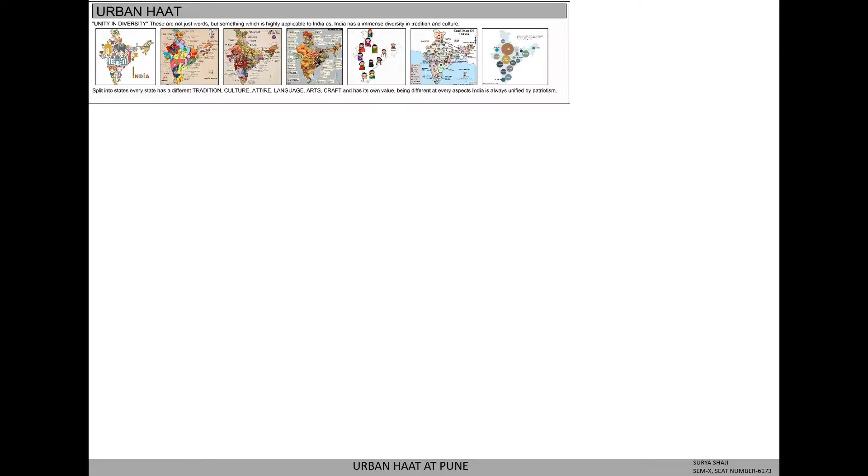So, what is an urban haat? Urban haat is basically a market where arts and crafts of wide varieties are sold and displayed. The scheme of an urban haat was founded by the Handicraft Ministry in 1999 in order to provide people with traditional skills a platform to display and produce their work.

Now, why is there a need for an urban haat? First, it helps to earn daily wages. It also helps in the economic growth of our country through cultural tourism and the handicraft sector. It also helps to revive the art, craft, culture and tradition which has been replaced by modern art.

Now, what are the initiatives taken by the government to promote the art? There are various yojanas promoted by the government. Some of them are Babasaheb Hastshilp Vikas Yojana, Jan Shri Bima Yojana, Rajiv Gandhi Shilpi Yojana, etc.

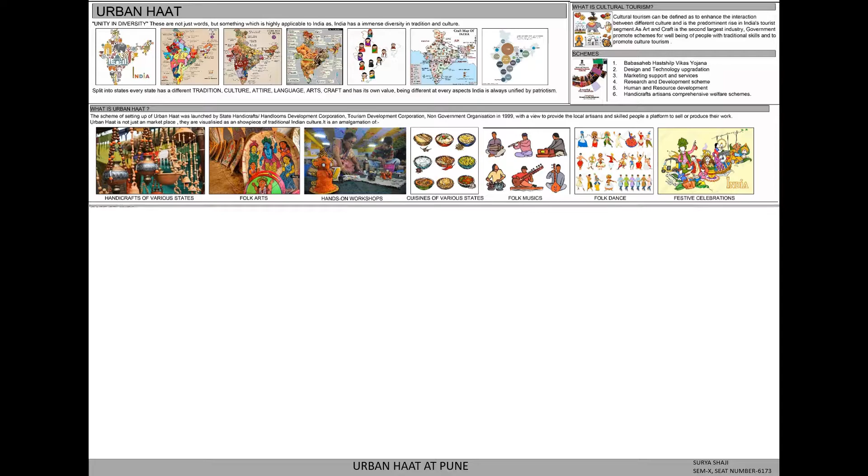Now, these are some of the live and net case studies done. The inferences from the case studies are: the activities were properly zoned out, but there was no connectivity among the activities. There was clear understanding in circulation and facilities provided for the visitor. There was harmonized landscape and ample parking spaces provided.

Now, where have I proposed my haat? It is in Pune. Why Pune? Pune being a cultural capital, there is no urban haat in the entire city. Also, as part of the Smart City project, there is a proposal for an urban haat by the Pune Municipal Corporation.

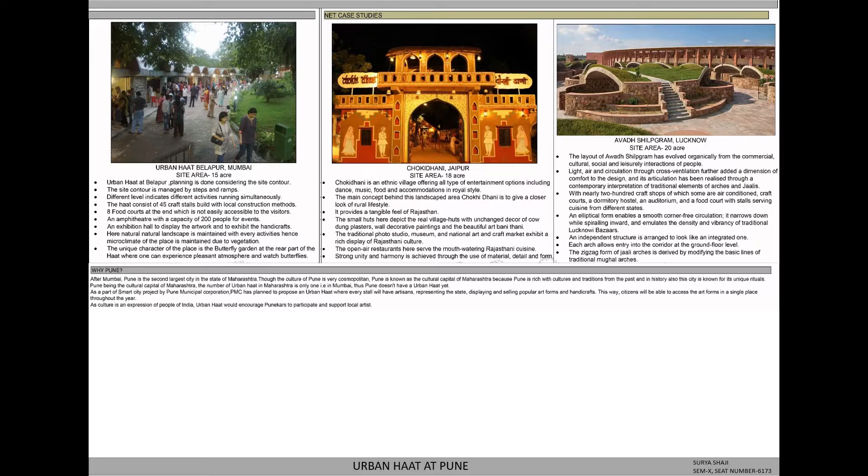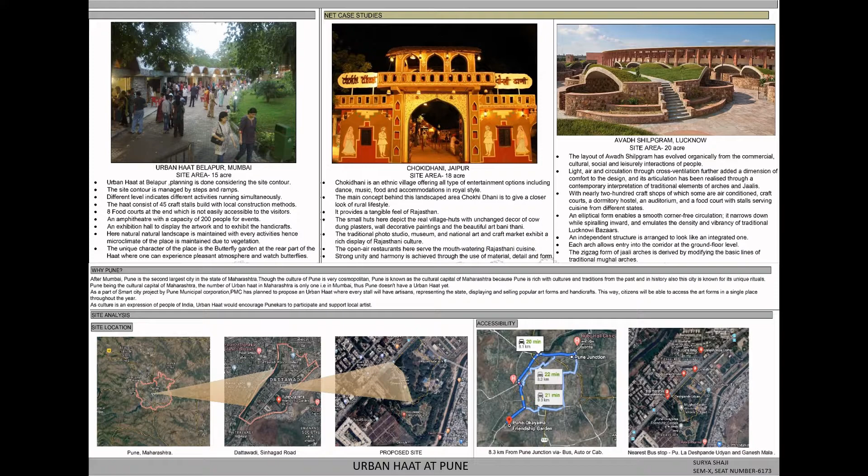Where in Pune? The location of the site is in Dattawadi, Sinhagad Road, which is 8.3 km from Pune Junction. This is the image showing the site surroundings. The site is surrounded by residentials, commercials, gardens and open spaces.

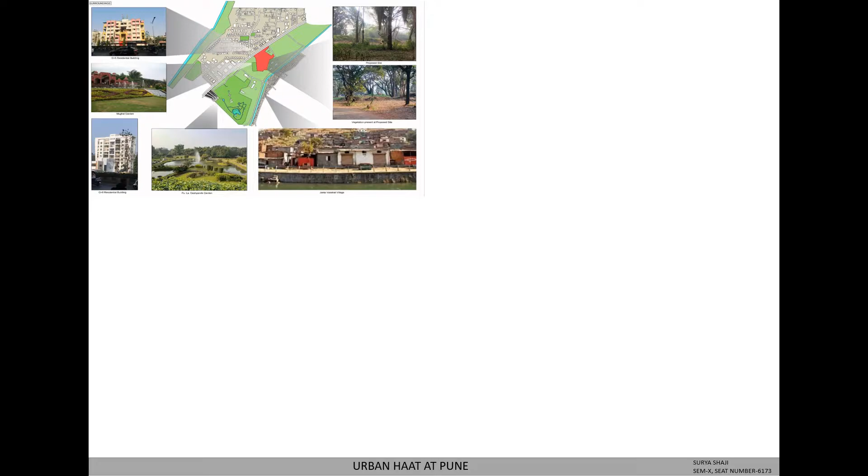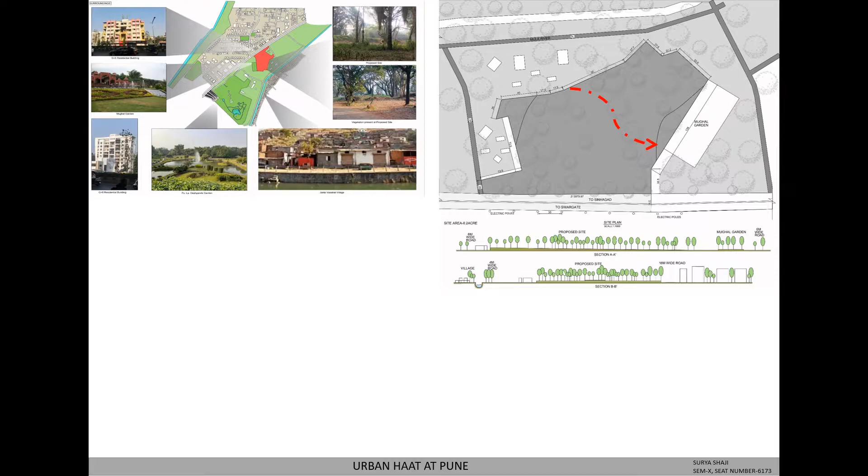Now about the site. The site has an area of 8.2 acres. It has a gentle slope of 3 meters. The site is also connected to the main Sinhagad Road.

Now, what are the positive aspects of this site? There are two gardens, Pu La Deshpande Garden and Mughal Garden, beside the site, which are tourist spots. The people visiting the garden can also experience the haat. Apart from that, there is a village at the rear side and a chawl near the site. Thus, the people living there can earn their daily wages from the haat.

Now, what are the negative aspects of this site? The site has many wild growing trees which can't be retained. As the site is connected to the main road, measures to control noise should be adopted.

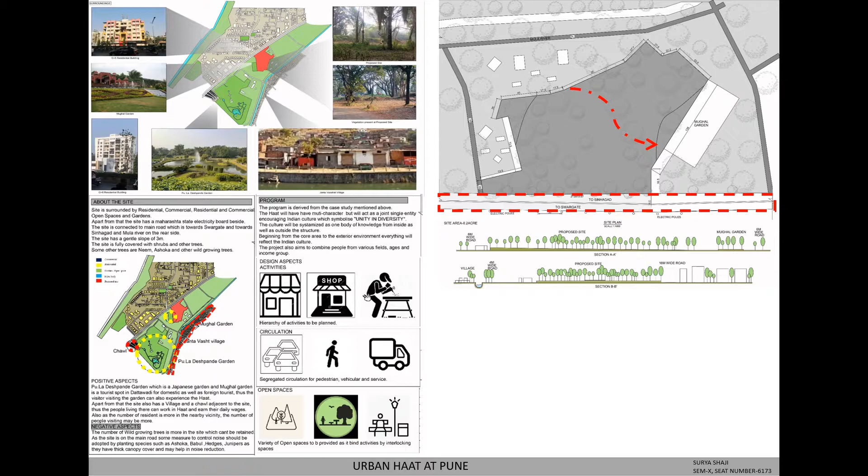Now, about the program. The program is derived from the case studies done. It aims to combine people from various fields, ages, and income groups. The main design aspects are hierarchy of activities, circulation, open spaces, and public convenience.

Coming to my concept: unity in diversity. Split into states, every state has different culture, tradition, arts, crafts, and lifestyle, and has its own value but is always unified by patriotism. So, how did I actually start my planning?

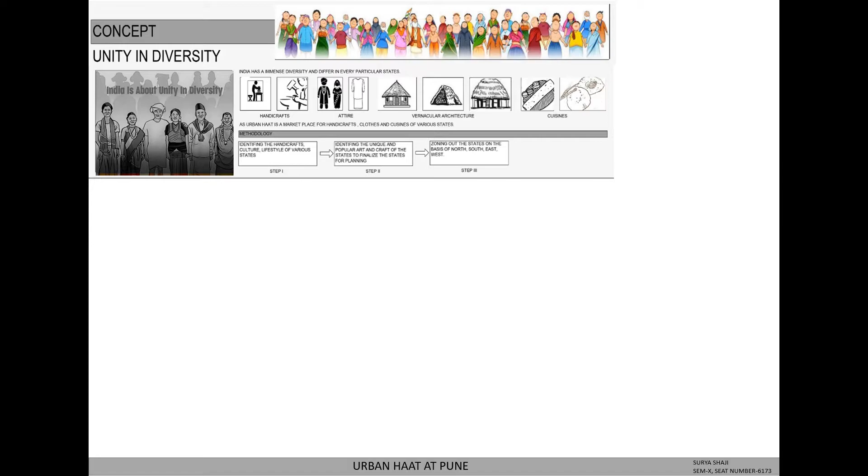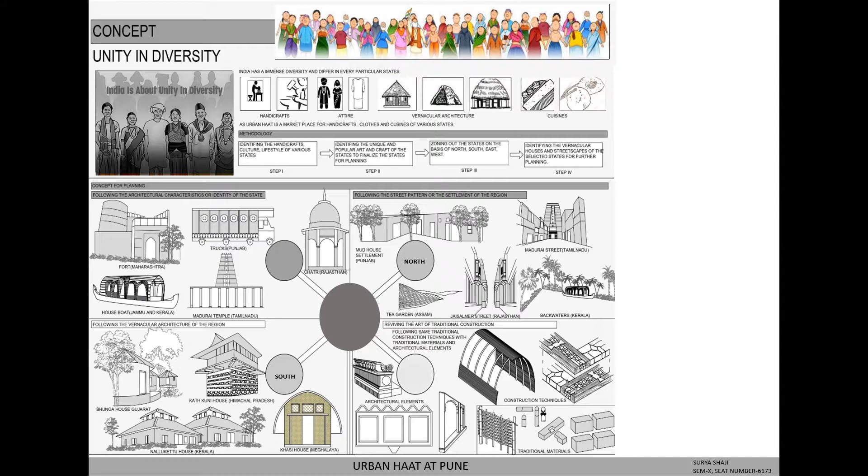This is my methodology. Step 1 is identifying the handicrafts, lifestyle, and culture of various states. Step 2 is finalizing the state. Step 3 is zoning out the states according to the four cardinal directions. Step 4 is identifying the cultural characteristics, street pattern, vernacular architecture and traditional construction. Here, a strong harmony is achieved through the use of material, detail and form. Beginning from the core area to the exterior environment, everything will reflect the Indian culture.

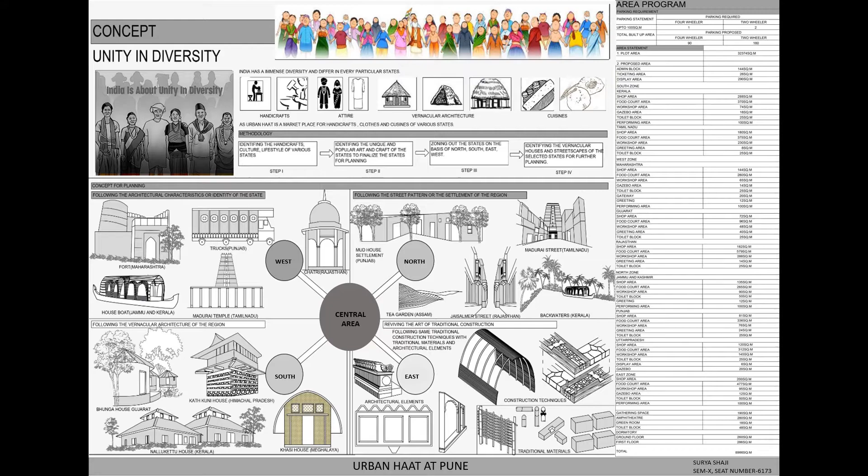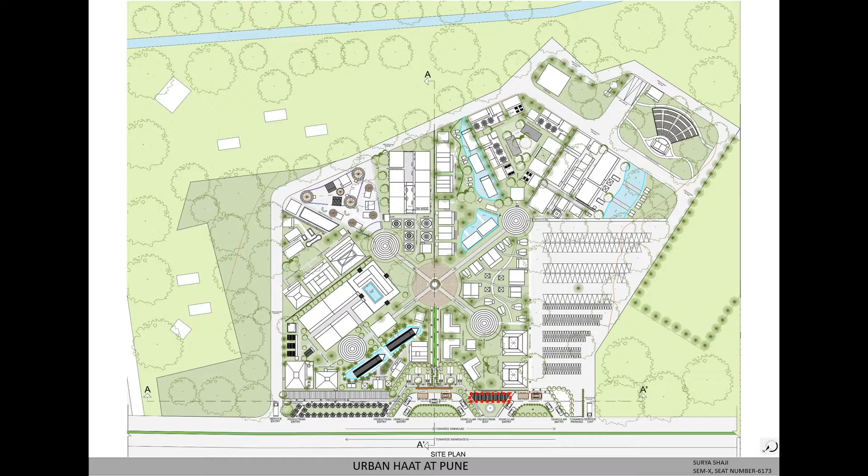Here, admin block is provided at the entrance. Dormitory and amphitheater provided at the rear side. These are the 2 security cabins for check-in and check-out. Here are the pedestrian pathways for entry and exit.

The public gathering space, which acts as the center core of the haat with seating, is where actual bifurcation of zones are done. The zones are zoned out according to the India map, which are South, West, North and East. Here, every zone is enclosed by a perforated screen which has a void so that people walking around can have a view of the zone.

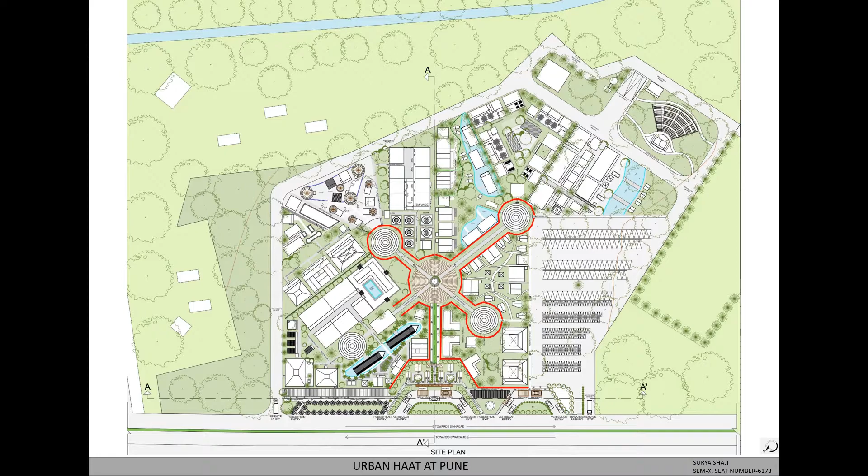Coming to the planning of South Zone, the 2 states that have a wide variety in arts and craft are Kerala and Tamil Nadu. Here, the structures marked in red are food court, blue are workshop, and orange are shop. So as soon as you enter, the visitor will be greeted in South Indian tradition.

Then one comes through the performance area. What one experiences as soon as you enter Kerala is a peaceful environment of backwater with lush green landscape with a stretch of palm trees along houseboats with Nalukettu and Ettukettu houses. Nalukettu is a house with 4 rooms and Ettukettu is a house with 8 rooms.

For the food court, the seatings are planned around the courtyard, and Kodi huts are planned such that workshop activities can be carried out. The upper level of the houseboat consists of a seating area where one can have the entire view.

Now, when you enter Tamil Nadu, what you experience is the Chitrakaru Teru, known as the street of artists, lined up with a stretch of shops and workshops with the focal point being the Gopuram. The Gopuram, being the entry exit, is a pillared structure with articulated columns which is a unique feature of the temple, built enclosed to provide a workable space for the shop.

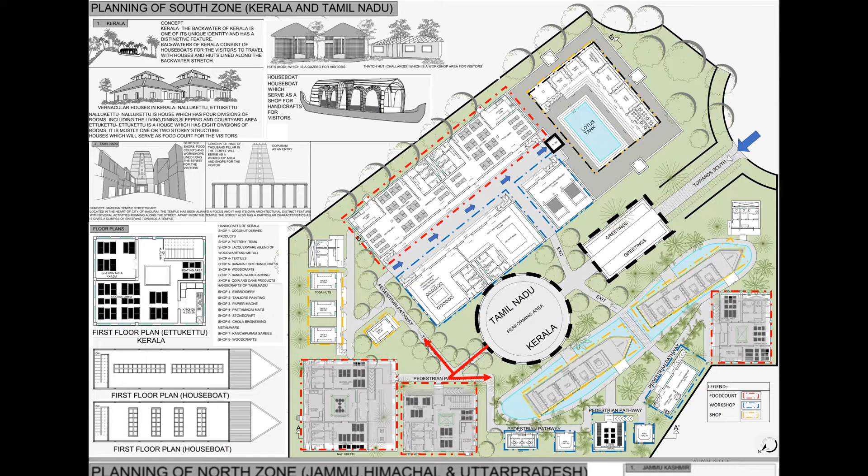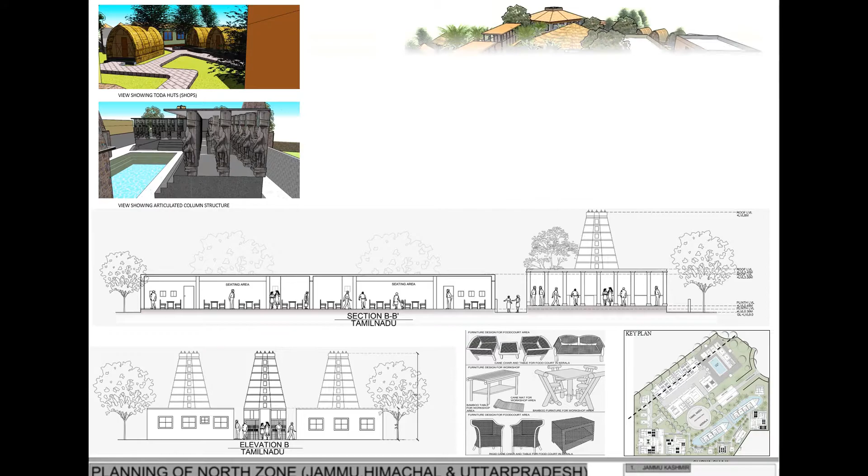Now coming to the west zone. In the west, the states which have a diversity in arts and craft are Maharashtra, Gujarat and Rajasthan. Coming to the west zone, what attracts the visitor is the fort architecture which has a massive Mahat Darwaza, that is the doorway, and a number of other stone structures planned for workshop and shop, with the statue of Chhatrapati Shivaji Maharaj at the above level, which is another main attraction of the fort area.

And these are the Vada houses lined along the stretch which reflect the Maratha architecture. The sitting area followed with the kitchen is planned around the courtyard which connects to nature.

Moving to Gujarat, the visitor gets to experience the Bhunga house, a circular and square mud house with a thatch roof, planned around the Bhunga settlement to give the feeling of a village, where different activities are carried out within the settlement.

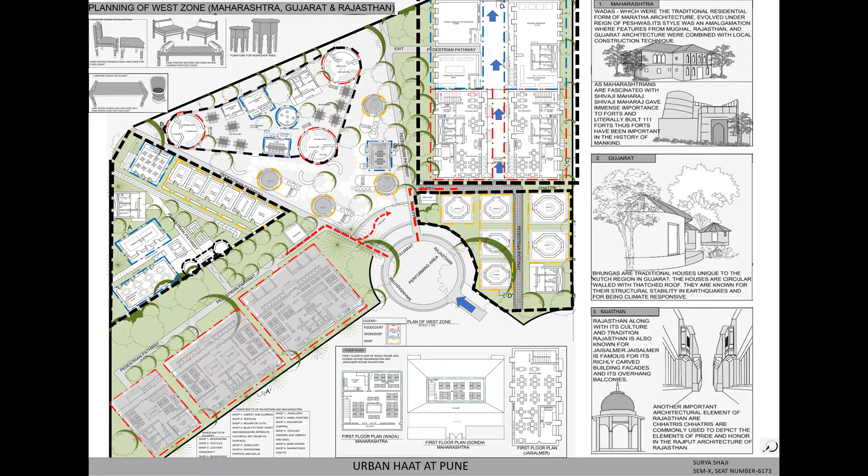Coming to Rajasthan, what the visitor experiences is the amalgamation of Mughal and local style. One can experience the street pattern of Jaisalmer houses, which are planned along a stretch facing each other. Then what one notices is the architectural legacy of Rajasthan, that is the chhatris, which are designed as an enclosed structure to provide a workable space for the shop.

Here, the elevation shows the Wada house and the elevation of Mahat Darwaza of fort, which is a stone structure, along with section, and here are some of the views.

The elevation of Bhunga mud house, where the exterior walls are adorned with colorful painting with niches on the wall, and this is the section of Bhunga house.

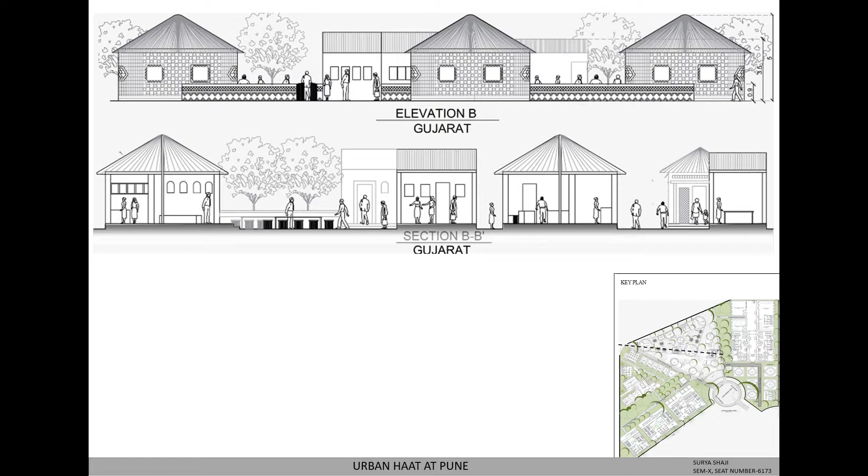Here the interiors are decorated with mirror work. These are the views showing the Bhunga houses.

The sectional elevation of Jaisalmer houses shows that the structure is a sandstone structure with arch entrance and articulated jali window with chhatris. This is the view of the west zone, and these are some of the other views of Rajasthan.

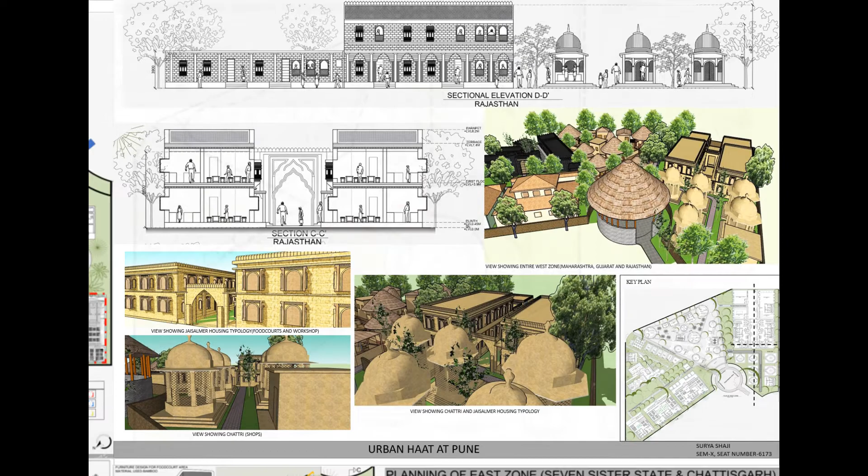Moving to the north zone. In north, the states which have a wide variety of art and craft are Jammu Kashmir, Himachal Pradesh, Punjab and Uttar Pradesh. As soon as one enters the part of Jammu Kashmir, they get to experience the peaceful

environment where lush green landscape with Taq House, the vernacular house of Jammu, and Kath-Kuni House, the vernacular house of Himachal Pradesh, is planned in levels to get the experience of Himalayas with water body along with the houseboat at

the front. Moving to Punjab, what one experiences is a traditional Punjabi Haveli where rooms are planned around the courtyard and an open courtyard mud house where all activities are wrapped up behind a mud boundary wall.

With a common gathering social place at the center with trucks designed for shops as an important mode of Punjab.

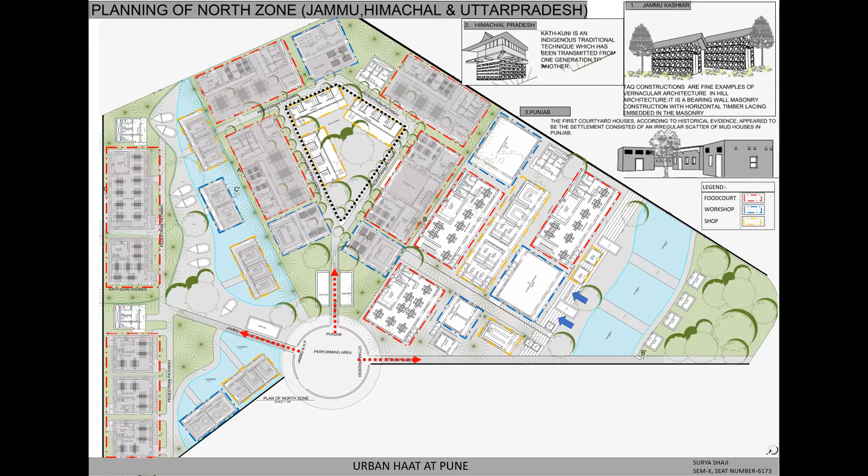Moving to Uttar Pradesh, here one gets to experience the Varanasi Ghat, the architecture of Kashi, with series of steps leading up to the structure where different activities are carried out and down to the water body.

Here are the section and elevation of Himachal Pradesh showing the Kath-Kuni house, which is a stone and timber based structure. This is the section along with the view of Punjab.

Here are the views of North Zone.

Here are the section and elevation of Uttar Pradesh. Watchtower, which is the main feature, is used to see the entire view of the Haat, and the material used for the structures here is sandstone.

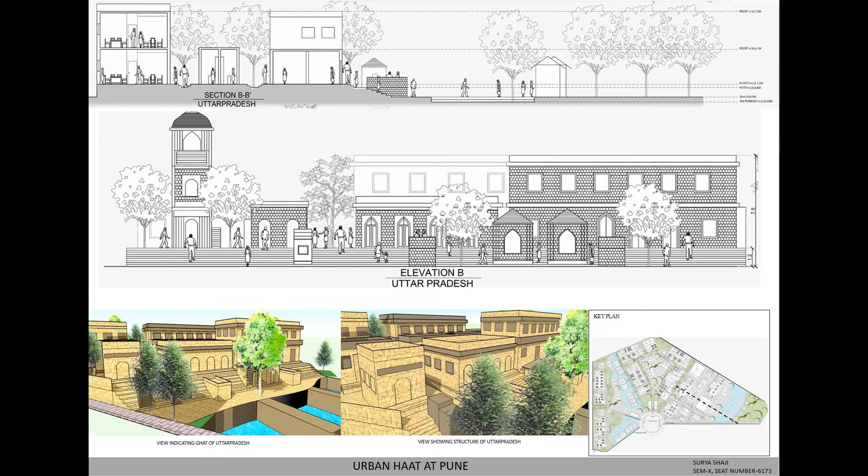Moving to the East Zone. In East, the states which have a wide variety of handicraft are the Seven Sisters State and Chhattisgarh.

In Seven Sisters State, visitor will experience the view of tea garden at each level along with bamboo house, chang house and Khasi house. Moving to Chhattisgarh, one gets to experience the scenic view of village with mud house and

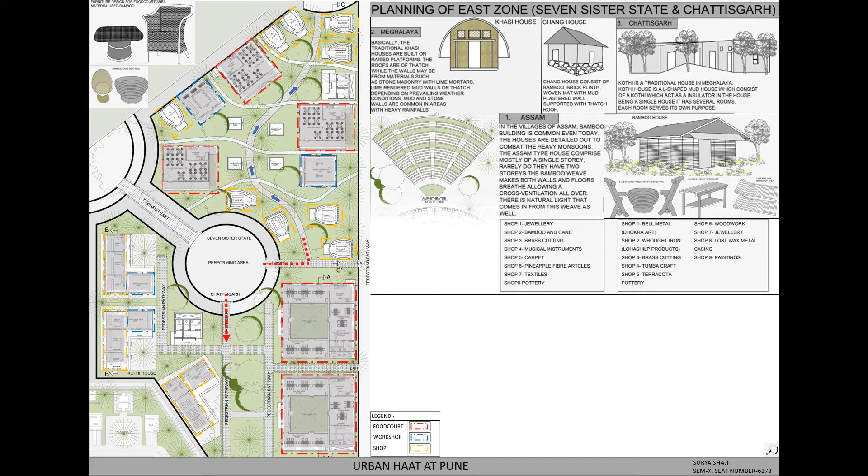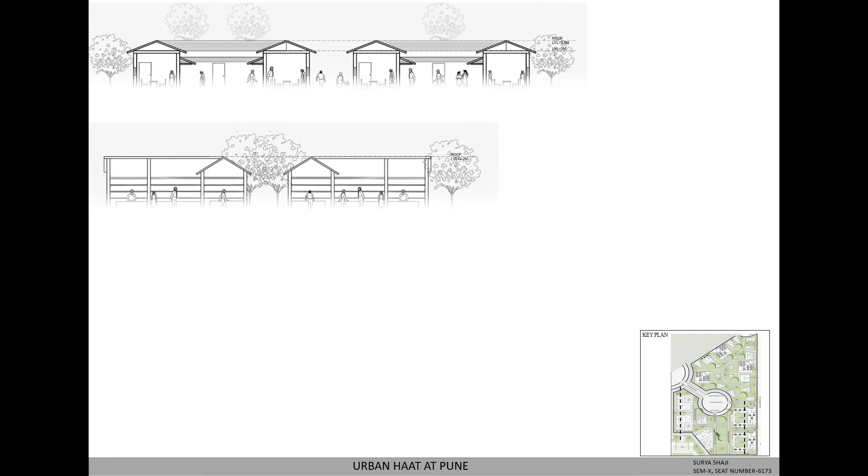This is the section and elevation of Chhattisgarh showing the mud house along with the view of East Zone.

This is the section and elevation showing the Chang house, Khasi house and Bamboo house of Seven Sisters State along with the views.

Now, let us start with the architectural representation and detailing. The basic concept is to revive the art of traditional architecture.

Coming to the structural system of West Zone, these are the details of Bhunga settlement, Gujarat. Here, the houses are mud houses with thatch roof.

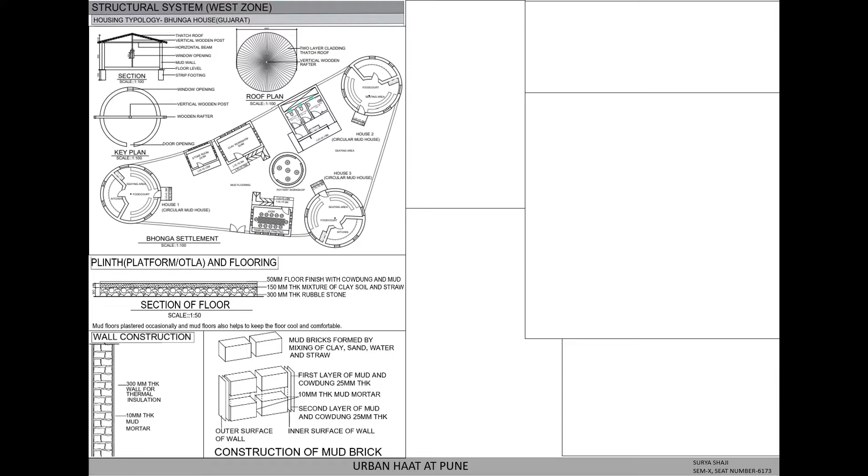Mud is a bad conductor of heat and it prevents the flow of heat between the surrounding and the internal space. Hence, it keeps the house cool in summer and warm in winter.

Here, the roof has a thick layer of thatch, which is again a natural insulator. The air pockets within the thatch insulate the structure in both warm and cold weather.

Niches in internal and external wall are the key element of Bhunga houses.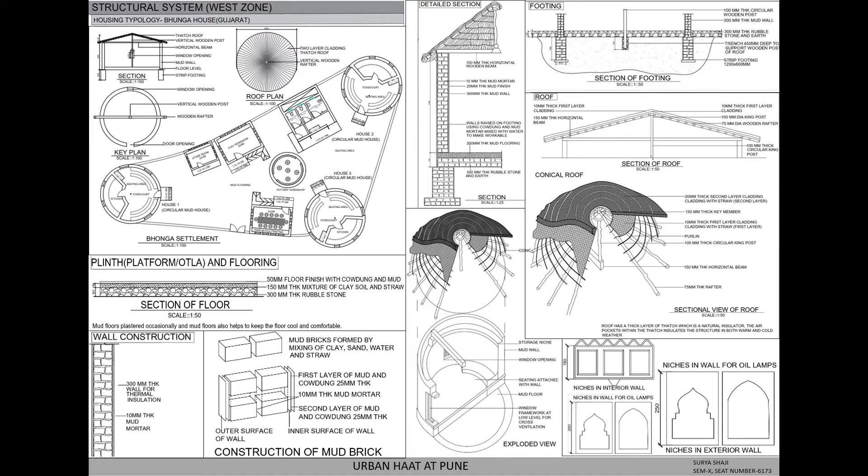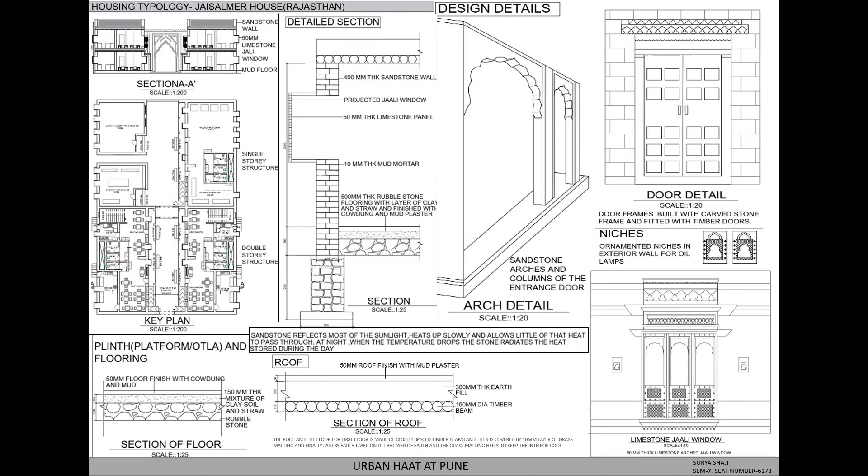When the temperature drops, the stone radiates the heat stored during the day, and the jali window ensures continued airflow. The roof consists of timber beam and grass matting with earth fill, which helps to keep the interior cool.

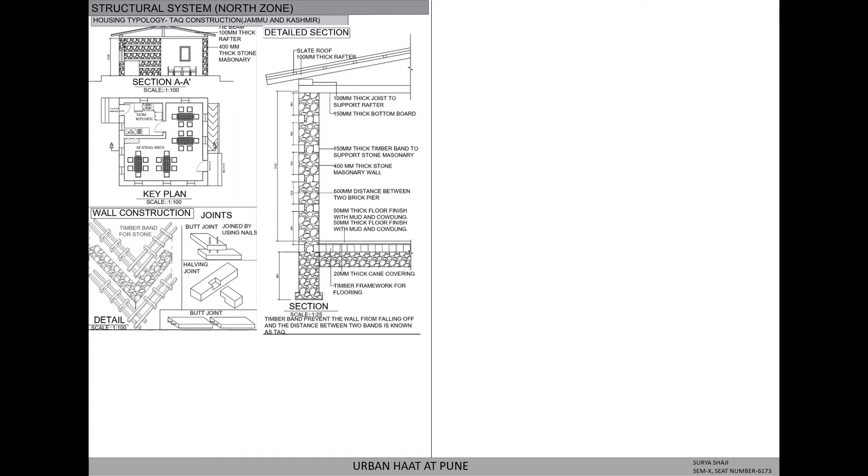Moving to the structural system of North Zone. These are the details of Taq construction. Here, the stones are placed between the timber bands, which prevent the wall from falling off, and the distance between two bands is Taq.

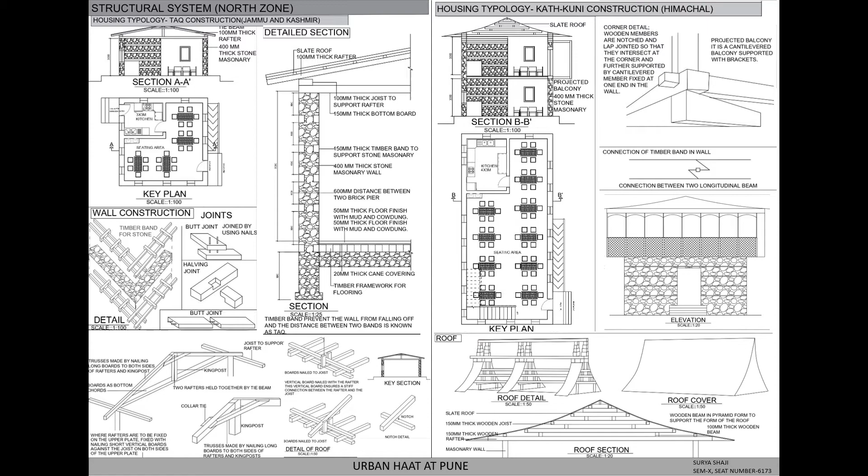These are the details of Kath-Kuni house. The construction details are the same apart from the roof. Here, the roof is a normal slate roof, and here the roof is a tapered slate roof, which is environmentally friendly, low maintenance and durable.

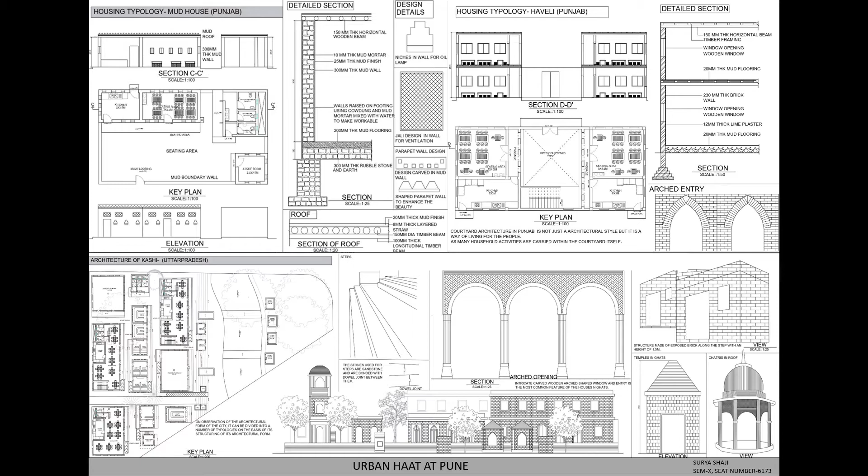This is the detail of courtyard mud house and Haveli of Punjab, with the key elements of the house being niches, jali design and parapet wall. These are the architectural characteristics of Varanasi, which have intricately carved wooden entry, sandstone steps and chhatris in the roof.

Moving to the structural system of East Zone, these are the details of Seven Sisters state. Here, bamboo is used for both roof and wall with mud flooring. Here, bamboo-to-bamboo connection is done with rope.

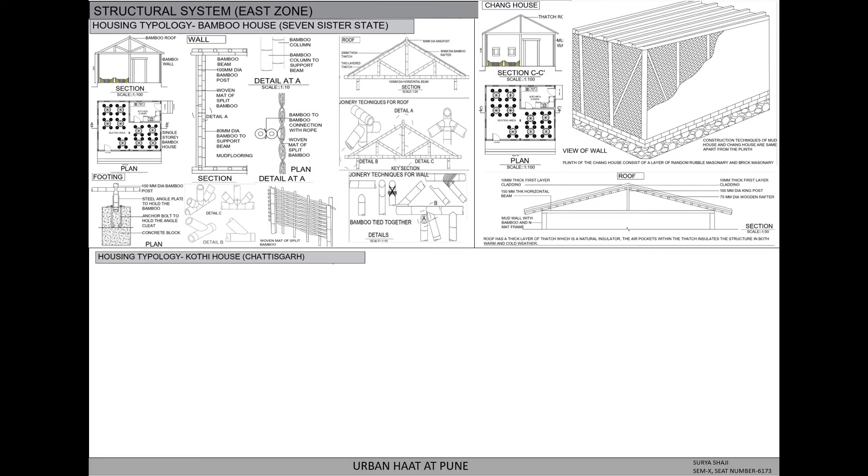These are the details of Kothi house, which has a half-height partition wall and a column-like structure designed with suspended floor for insulation. It is extremely malleable and offers better insulation than steel and concrete.

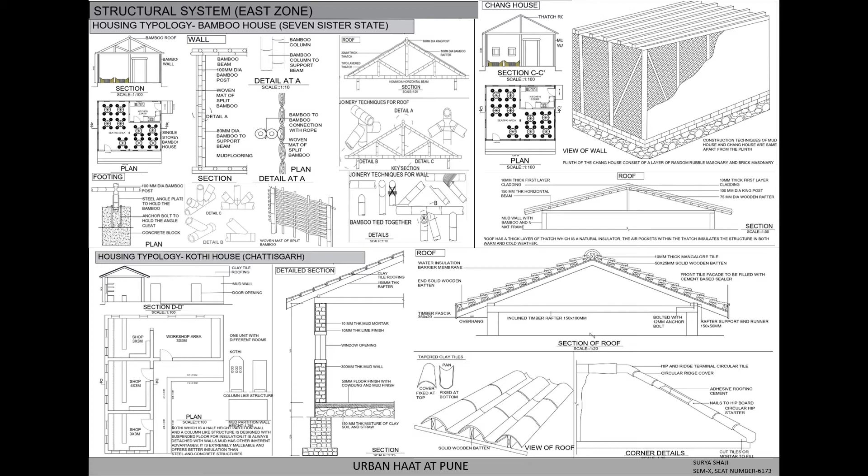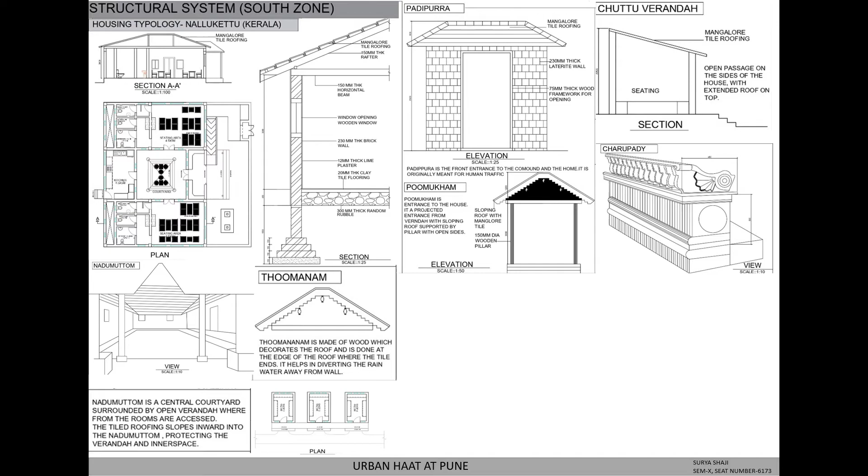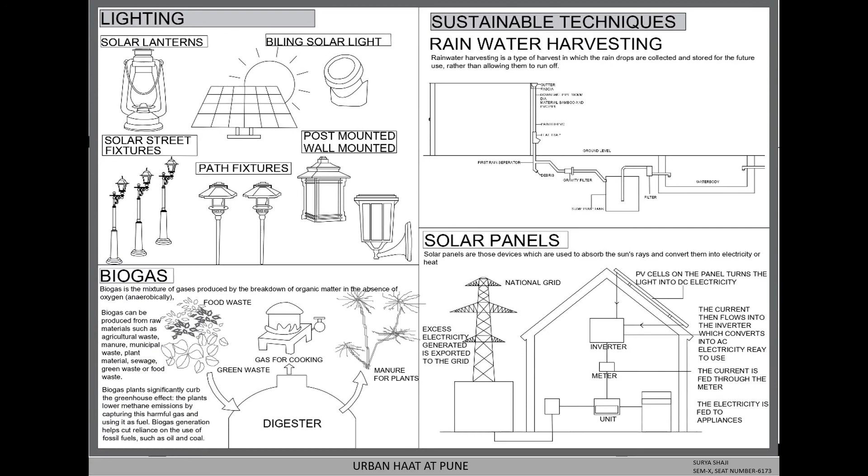Moving to the lighting and sustainability aspect. Here are some of the traditional lighting used: solar lantern, which is used at the food court. It controls the panel to control light intensity.

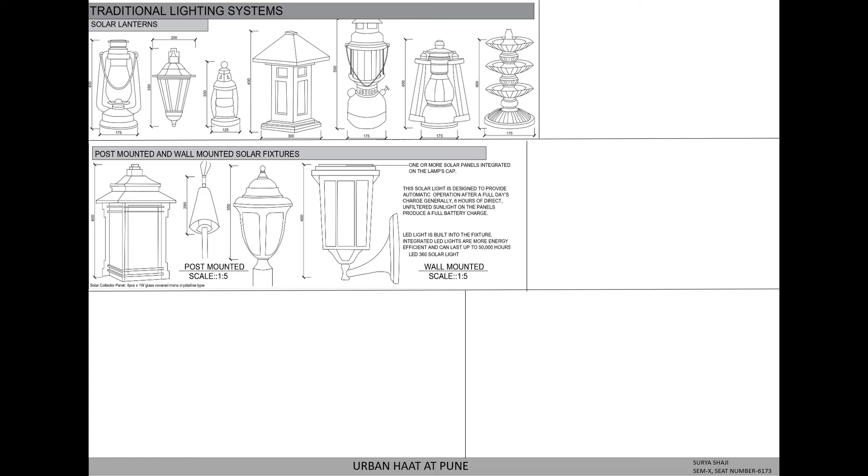Post mounted and wall mounted solar fixture. This solar light is designed to provide automatic operation after a full day's charge. Generally, 6 hours of direct unfiltered sunlight on the panel produces a full battery charge.

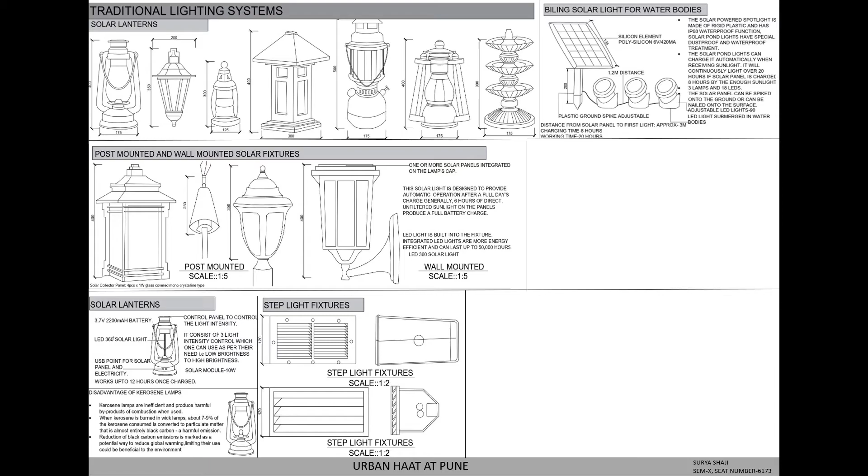The solar pond light can charge automatically when receiving sunlight. It can be spiked on ground or nailed onto the surface. Wall mounted light, and others are solar street and path fixtures.

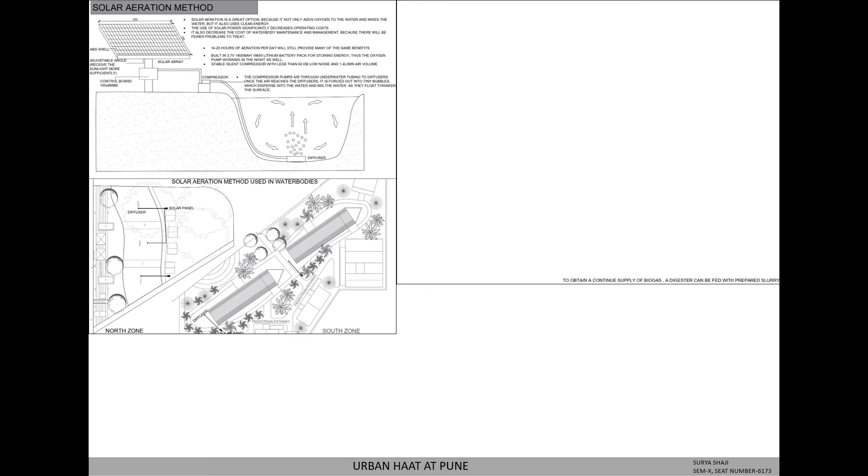Here the compressor pumps air through underwater tubing to the diffuser, and once the air reaches the diffuser it is forced out into tiny bubbles which disperse into the water as they float towards the surface.

Coming to biogas, fixed dome biogas is used as the waste generated from the food court is more. Other sustainable aspects used are rainwater harvesting and solar panels.

To examine in the current scenario, a traditional node of social structure, its integration within the urban fabric, and establishing an interrelationship between the craftsman and craft as a system of interconnecting layers, the layers classified as social, environmental, cultural, and economic. The design would look at the provision of not just the ambience and essence of traditional rural art, but a typology well suited for temporary needs.

Looking at a particular line of craft in an urban scape and making an interface between the craftsman and the customer, with special emphasis on craft and space. Thank you.